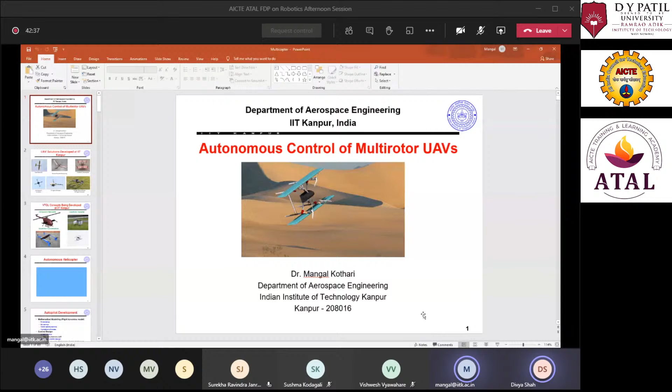Good afternoon to all, and let me apologize that you are not able to see my face through the camera, but in the next one and a half hours we'll enjoy learning about multi-rotor UAVs.

So the session is on robotics. I will be giving a talk on multi-rotors, but it will touch on various aspects of robotics. One of my research interests is aerial robotics, so I'll talk about autonomous control, but it will also resemble ground vehicles that I work on, such as legged robots, and we'll look into different aspects as we move along.

Thanks, Prasid, for inviting me and giving this opportunity. I'm happy to share that two of your alumni are working with me and doing really well. I think Ajit conducted a session a couple of days back, he's also working with me, and there's another student, Vinit Menon, working with me too. So I think you are getting very good training, and I am really happy with your alumni.

Okay, with this I will start my talk, just to give an idea of what we are working on. So we are working on a number of aerial vehicles.

We start with the fixed wing UAV. You've seen fixed wing aircraft everywhere, many of you have flown them. The whole idea is to make it autonomous. It has a 2 meter wing span with conventional control surfaces - elevator, rudder, aileron, and throttle. We control it autonomously so it can loiter, do path following, and other maneuvers. Although we designed this at 2 meters, we can scale it up for much longer wingspans.

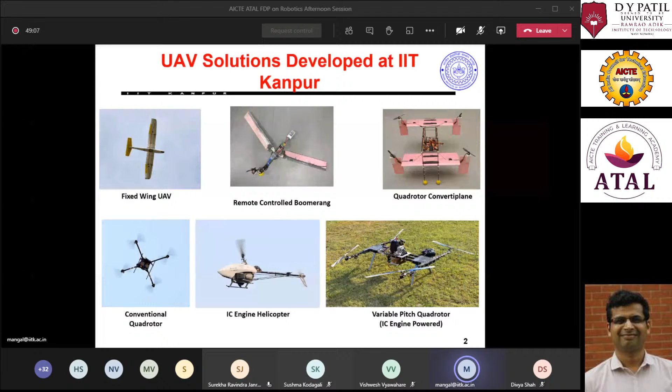As I mentioned in the previous slide, there is a limitation on the quadrotor - an endurance limitation. The reason is that the weight is supported by thrust, and thrust is expensive to produce because it requires power, and you can only carry limited power through your battery. So if one has to increase the endurance, they can put a couple of wings as shown in the figure here.

This makes the vehicle a fixed wing type. When it's a fixed wing type, the weight is supported by lift, and lift is generated by air passing through the two wings. So the thrust requirement now is only to propel it in the forward direction, creating relative motion of air with respect to the wing. This reduces the thrust requirement, so your power requirement reduces and you can fly for longer.

Such VTOL vehicles have an advantage compared to traditional rotary wing and fixed wing vehicles. Fixed wing vehicles require a runway for takeoff and landing - you can do hand launch or catapult launch for takeoff, but for landing you require some infrastructure. This type of vehicle does not require any runway, so you don't need that infrastructure. This is the advantage of VTOL type vehicles.

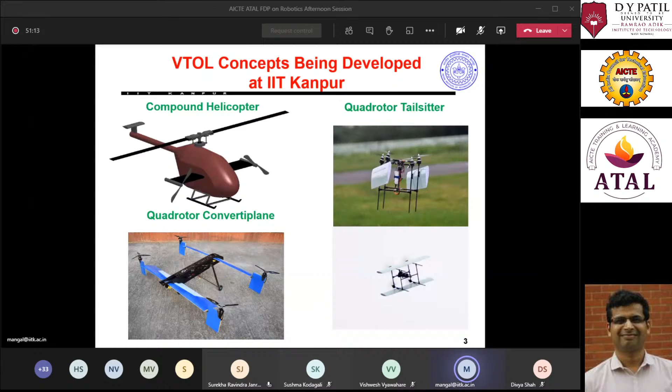Once it's in the air, it can transition from the typical multi-copter type to the fixed wing type, gaining the advantages of the fixed wing configuration. There are many such concepts being researched and employed in the market.

I'll start with a short video of what we have done with the helicopter, and then come back to the technical details. This is our autonomous helicopter we have developed at IIT Kanpur. It's a single rotor, and you can see there is one autopilot board.

So the autopilot board is known as PixHawk. It is made on STM32. In STM32, what we do is have an RTOS. There are different RTOS available, so we are using NuttX, but one can use FreeRTOS, Zephyr, and ChibiOS.

Then you have a middleware. Middleware in the programming has a publish-subscribe thing, so I think you have been introduced with ROS. One node talks to another node, so inter-process communication happens through publishing and subscribing.

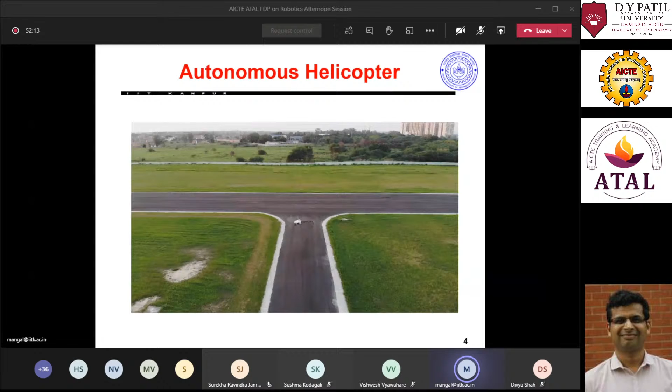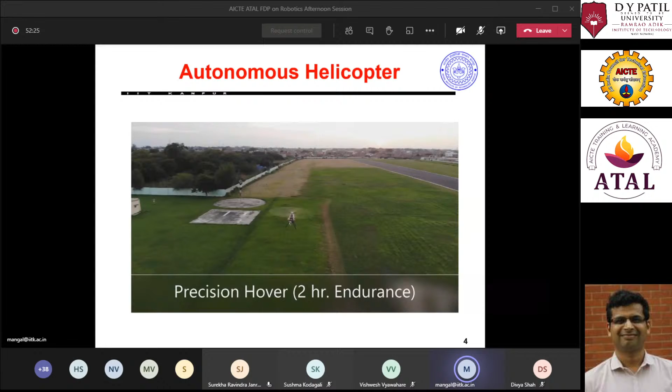So you have an IMU, which has an accelerometer, gyroscope and magnetometer. They will publish their readings, and then you have a sensor driver that will take this reading and create an attitude. That attitude will again be subscribed by your attitude controller.

It will use control like PID, or sliding mode, what is being taught or the expertise of Dr. Prasiddh Trivedi, or any non-linear control like backstepping, and it computes the control command. That control command, through your PWM or servos, is given to your vehicle, and you fly that.

You may have a GPS also, so you read the GPS data. So you have an applications layer, you have a middleware, and the RTOS. That is all done for the PixHawk board.

And the good thing is that it's open source available, so you can tweak the controller if they have given the PID. But if you want to employ non-linear control or advanced control, you can do that and fly. Apart from the control scheme, there is a frame design also.

So you have to design the frame which is robust, which has less drag, so it can have good endurance. You can see that this vehicle is performing different types of maneuvers, and this is a really aggressive vehicle. So when it has to go forward, what it does, you can assume there is a thrust vector that supports the weight.

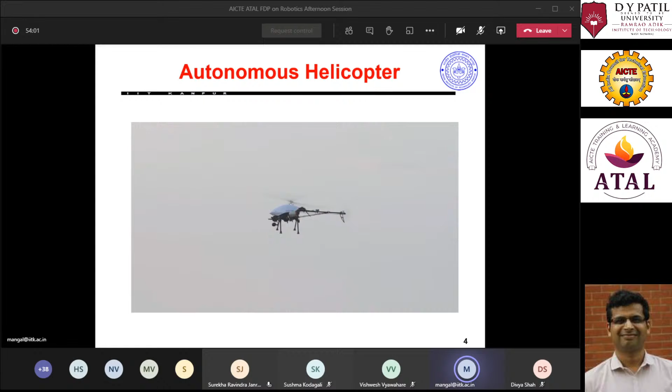When it has to go forward, that thrust vector is tilted forward. When it has to go sideward, the thrust vector is tilted sideward. So accordingly it does that, and for yaw motion it will generate force from the tail rotor, and it has a moment arm with respect to CG. So CG is close to this rotor hub, and then you have a yawing moment.

So now one of the interests is in autopilot development. When we have to develop the autopilot, we require mathematical modeling, because we have to develop the control law based on some models. So we have to develop a flight dynamics model. Why am I telling flight dynamics? Because it's related to flight, and dynamics model means how it evolves with time.

So in order to develop this flight dynamics model, you have kinematics and dynamics. This is already available for all the vehicles, whichever robotics aspect is there. Kinematics relates to position with velocity, or angular displacement with angular rate. Dynamics is a kind of Newton or Euler's laws, F equals ma.

Only thing is, now the vehicle is moving, so it's in a rotating or accelerating frame. It's not an inertial frame, so we have to fix it. Similarly, you have to use the Euler equation for moments. So these are the kinematics and dynamics. Usually it's a bit difficult for electrical people, but once we understand, it's pretty straightforward.

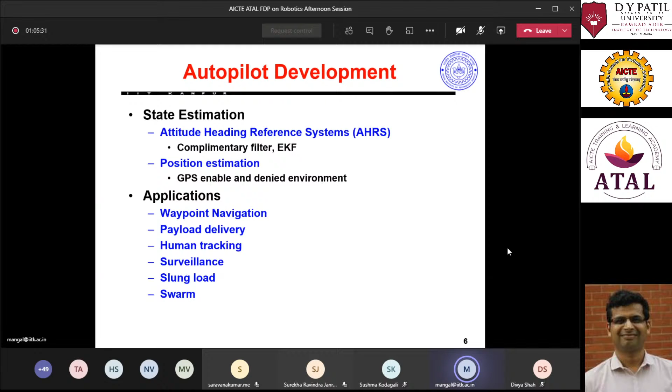Now coming back to a little mathematical detail, after giving this technical background. You might have seen such a quad rotor, an experimental platform. So what is the idea? Each rotor generates one thrust, perpendicular to the plane of the rotor, and there is a torque.

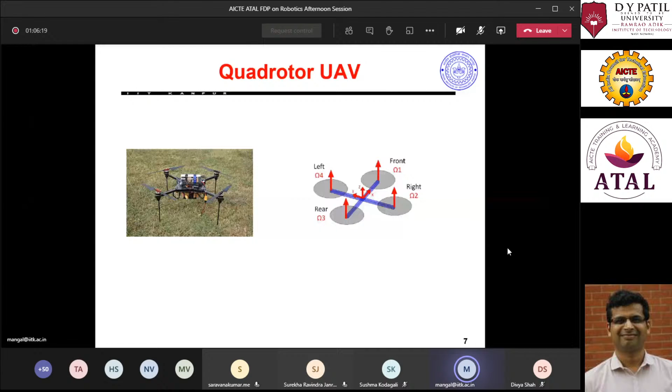The torque is generated because you are dragging the rotor through the air, so some drag force is created. When multiplied by the moment arm, it can generate the torque. So each rotor generates one thrust, which comes from the lift, and another one is torque. Using those combinations, you stabilize the vehicle, or make it move forward or in the sideways direction.

To understand this, when we want to develop the mathematical model, we require coordinate frames. The reason we want coordinate frames is that Newton's law is valid in the inertial, or non-accelerating, frame. The body velocity, or the thrust, works in the body frame. As I told, it is perpendicular to your rotor frame. So they are in different frames.

And if you are using a camera for estimation, it will have a different frame. If you are using lidar, your point cloud will be in a different frame. For example, lidar will give the point cloud in the lidar frame, and the camera is looking into a different frame.

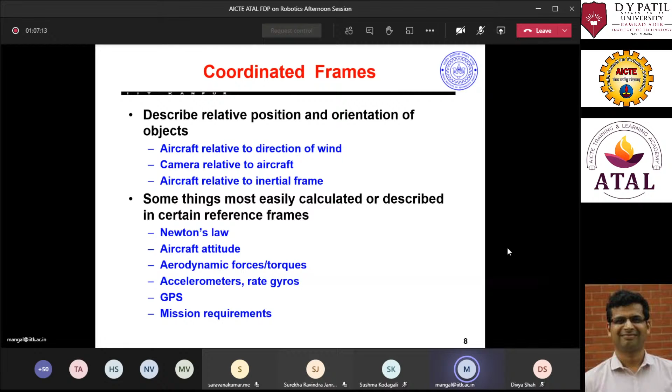So you have to project this different quantity into the same frame for decision making. So apart from the dynamics, from a sensor perspective, we also require different frames. So what are the basic things?

If this angle is known to you, you can play with this, or you may know the relative rotation of that. But then it's difficult to compute. So there are different ways of representing this.

I'll start with the rotation matrix. That gives rise to your geometric control. That means the rotation matrix evolves on SO3.

What happens when I say that rotation matrix determinant is 1? Whenever you rotate, you have a sort of SO3, special orthogonal group. If 9 elements are there and the transpose is equal to the inverse, it does not have a singularity. It has one-to-one and onto property, so any ambiguity is not there.

But then you have to play with the matrix, which requires differential geometry. We are not very happy with the matrix differential equation. If someone gives us ordinary differential equations, we are happy. If we have to solve the matrix differential equation, it's not convenient for us. So now people are doing this.

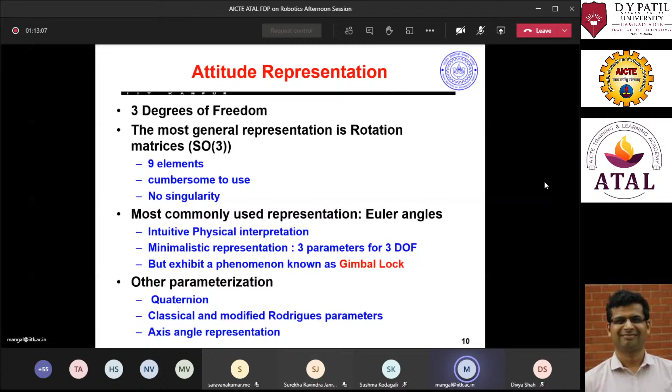In these lectures, I am not deriving these equations. So when you do all the things I talked about in the last 15-20 minutes, what will happen? You will get such kinematics. This is like position kinematics, this is like rotational kinematics, and this is kinetics. Kinetics is nothing but dynamics. You get how UVW evolves, that's dynamics, and this is rotational dynamics.

If you are from electrical engineering and have read the state space method, you should be very happy. Someone has already provided a mathematical model where my control input is T L M N, and states are X Y Z, that is position, phi theta psi, that is attitude - roll, pitch, yaw - UVW is translational velocity, and PQR is rotational velocity.

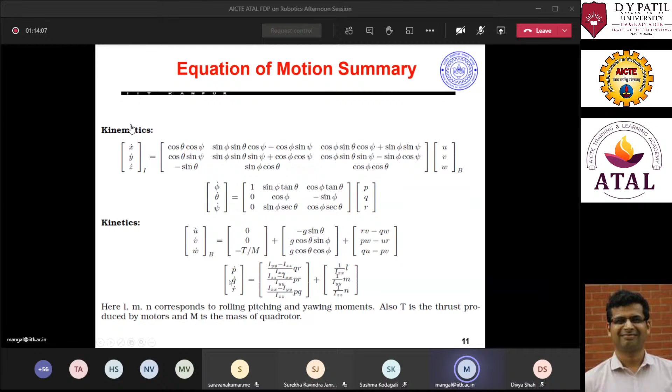Now look into this: CT is some coefficient. If you are not changing the blade pitch angle, this is constant. Rho is air density, A is area, R square is radius square, and omega square is like your RPM. So thrust is proportional to RPM square. Although there is non-linearity, this is constant if you are not changing the blade pitch angle, so you do not have to worry. Similarly, Q is proportional to omega square.

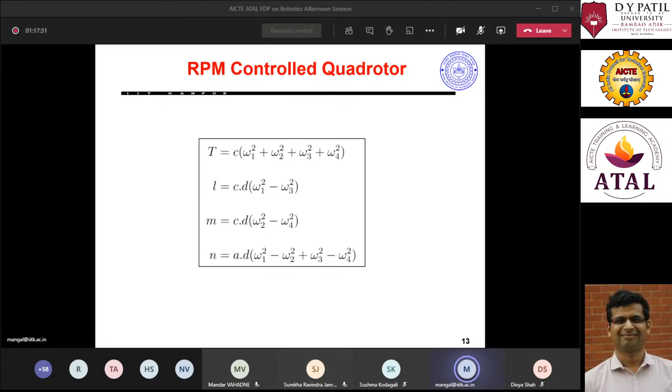Okay, now coming back to that, this is one of the control laws. So what is there? We'll say, okay, I have to control the position, I have to control the attitude. But how many inputs are available? I have 4 inputs and 6 outputs, so it's difficult to solve the problem.

Then what I see, okay, people are doing that. I look into the literature and I say that people solve this using the time scale separation principle. So it is like in a similar autopilot, right? You are serving the different tasks.

So in the mechanical or aerospace design, what they say is that your translational and rotational dynamics evolve on different time scales. So when you are doing anything on the translation, you can assume that the rotational loop has done its job, so whatever demand you give to rotational, it will feed you. But whenever you are doing anything on the rotational, you assume that translation is really constant, nothing is changing.

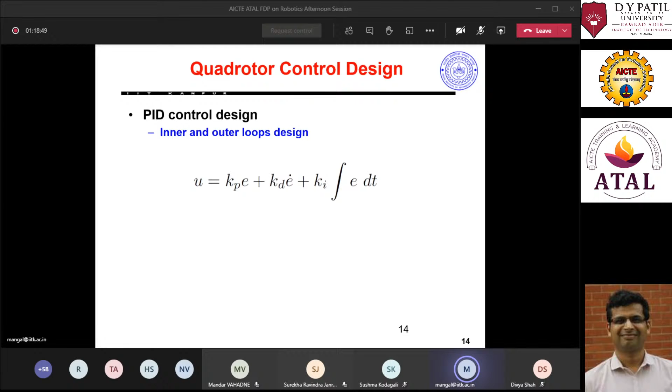So if you assume that you have two fully actuated systems, that is known as the inner and outer loop design. In the inner loop, you play with the attitude, and in the outer loop, that is also your guidance design, you will play with the position or guidance, how to change the waypoints and other things.

So for stabilization, that means you want to do the hover only. So what is there? Phi, theta, psi is your current attitude. Phi desired, theta desired and psi desired is 0, but I am putting here the phi desired, theta desired and psi desired generally. So if we have to do attitude tracking, we can directly use this control law, we don't have to do anything.

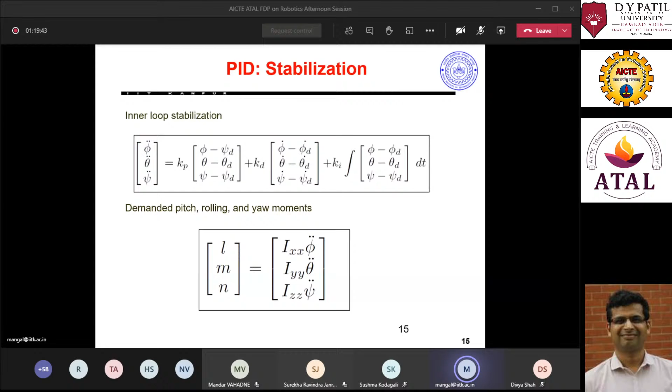Then you have derivative terms and integral terms. So with our PID law, you know what angular acceleration, rotational angular accelerations, is required, and if you multiply with the inertia, you will get what rolling, pitching and yawing moment is required. Now L, M, N is there. Now this L, M, N you use with your control allocation, and you will change your PWM, that is duty cycle.

And similarly, what we can do, now I see what is the error in my position. I use the D terms, I use the I terms, and I find the inertial acceleration. Now what happens in a quadrotor? Say Z you can change using your thrust, but the X and Y position you change using the pitch angle and the roll angle. So this is some approximation.

Now, like Pixhawk type autopilots are available, we will look into that autopilot architecture, and all these control designs are already designed. You have to only adjust the gain.

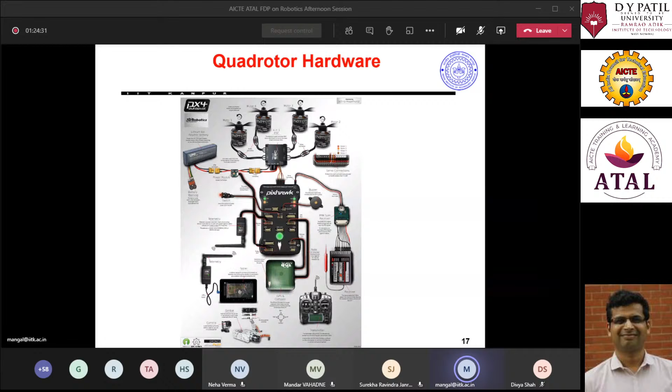So you want some RTOS. What is RTOS? It's a real-time operating system that will help you do anything. The reason you require RTOS is so you can directly call a function saying 'I want IMU, GPS' without doing bare metal programming. So what happens now: you have hardware, and this peripheral driver will be taken care of by the RTOS. Your sensor driver will say, okay, I need I2C, I need SPI, give me the data, so it will configure that pin and enable it.

Then it will read that data from the register, and it will be published on the sensor driver. This sensor driver will take the data, and whatever attitude or position estimation is required through the kernel, there will be an application layer where different applications can subscribe to the sensor driver and get the data of the GPS or the IMU. Similarly, when you want to run your timer, you can ask the kernel, and it will interface with the timer to drive particular pins or a particular motor.

I am not going into a lot of detail on the programming. I believe it would be discussed by someone else. If it's not discussed, lots of open source resources are available. You can look at Pixhawk, you can look at ArduPilot.

At IIT Kanpur we have also developed Navic, and recently the Indian government has launched this microcontroller challenge program, where they have come up with an FPGA-based board. One is Vega and another is Shakti, and they have provided I think two types of RTOS: one is Zephyr and another is FreeRTOS. And then you can have your middleware.

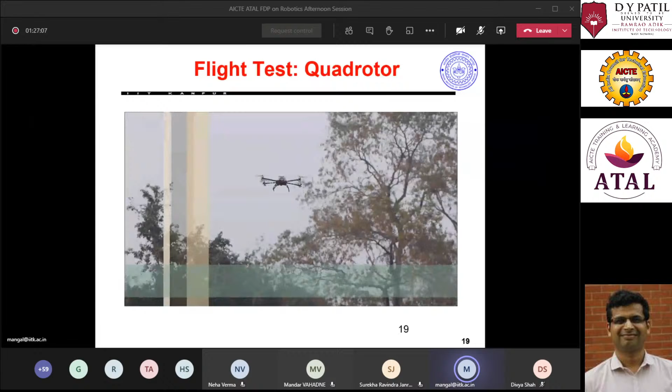Right now what I am going to show is a video from 6 or 7 years back, about what I was just talking about. That work started 6 or 7 years back, and I can talk about it because of the experience we gained doing all these things. This is the reason I am showing that we started from the very basic things.

If you can see, the autopilot was put in one box. If you look at DJI and Skydio now, you may not like it, but you do not reach that level unless you start making your hands dirty with the hardware and learn the basic things. So we designed an autopilot, going through each nitty-gritty detail as I discussed. We understood what RTOS they were using, Nuttx, which is one of the very good RTOS. We also explored ChibiOS, another one used in autopilot, and then we did all the basic things.

So this was our work, and I have given the idea about all these things. So what is the limitation of conventional quadrotor?

Apart from the autopilot things, we are also involved in designing the quadcopter. As I told, everyone uses the same 4 motors, because they buy either from T motor, like Tiger motors, or maybe KDE or local motors. Everyone uses the same battery, lithium polymer or lithium sulfur - I don't think people use lithium sulfur now, but lithium ion. But some people get 10 minutes of flight time, another gets 30 minutes, or maybe maximum 60 minutes. What is the difference? The difference is in the optimization.

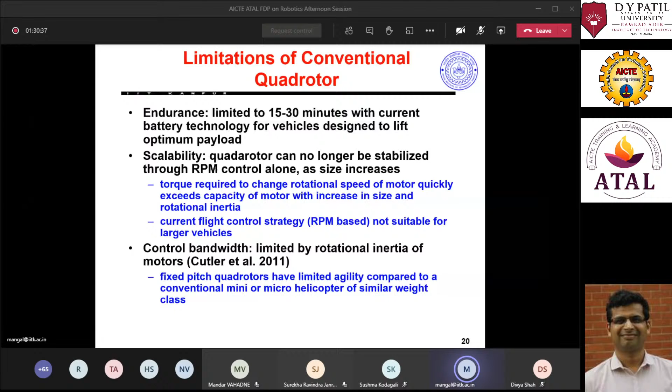We are not the ones who started working on this - there are people, even during the invention of the helicopter, who explored this idea, but it was given up. The reason is that the alternate design, at that time, got a lot of funding. Maybe I have a video I can share. But we are the ones who proposed for the first time a systematic flight dynamics model, and based on that a lot of work was developed.

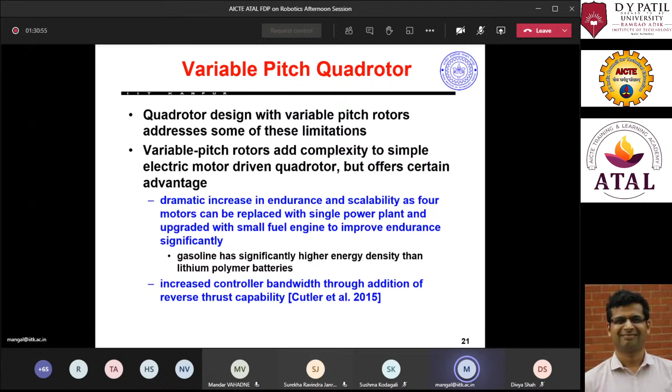So let me explain what is a variable pitch quadrotor. In a conventional quadrotor you have a motor and a propeller which are fixed - nothing, you just change the thrust by changing the RPM.

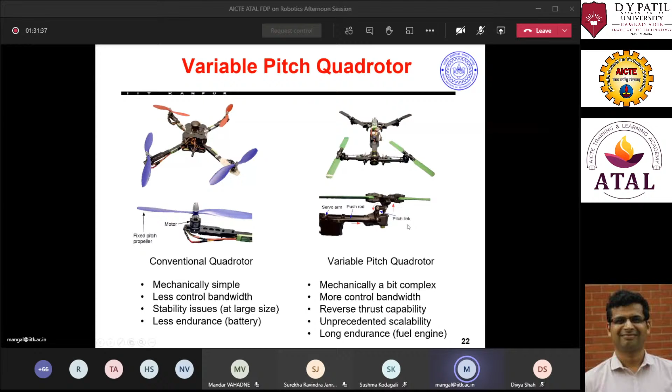In the variable pitch quadrotor, the rotors are placed with the help of this assembly, and there is some rod which changes the blade pitch angle, so you can move it up and down through the servo. You can change the orientation, so that will change the blade pitch angle. It's a bit mechanically complex, but we don't have to worry - there are precise manufacturing methods and servos available, so we can achieve that.

Now we can look into other control designs also - that could be back stepping or dynamic inversion. Dynamic inversion is straightforward to do, but it cannot handle modeling uncertainty, because you are cancelling out everything. So even if a slight inaccuracy is there in the cancelling, it may degrade the performance of your control scheme.

So one of the approaches is to use back stepping. Quickly I'll show you that - don't worry about it, don't get into the mathematical detail. Nowadays all video lectures are available. Whatever I am talking here, if you do not understand anything, if you Google it or search on YouTube, you will get all the lectures available. You just have to go through this and try to implement it.

What this backstepping requires is that the system should be in a strict feedback form - like x dot equal to fx, or x1 dot equal to x2, x2 dot equal to fx plus gx u, and then you design the u. I'm sorry, I am not using the board - I should have, but it didn't occur to my mind, otherwise I would have written it here.

So we choose one system phi, theta, psi, and the other one PQR, and two subsystems in the position. One is altitude Z and Z dot, because we can change the throttle to adjust the speed, and another is X and Y, using phi and theta to change it. So we can write it in this strict feedback form - this is like rotation, this is horizontal, and this is altitude.

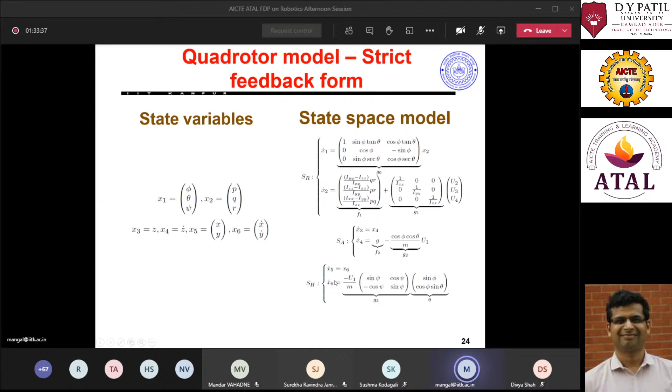Okay, this is a subsystem, and now we can design a different control law for this. Unlike a fixed pitch control law, now this control allocation becomes difficult.

Why does it become difficult? When we design the mixer or control allocation, you have some value of T, L, M, N, and you have to give the PWM. With T minimum, what will be the pulse width, and with T max, what will be the pulse width? Now we have CT, and the relation between T,L,M,N and CT is non-linear. So whether we do curve fitting or generate lots of data to fix it, that is difficult.

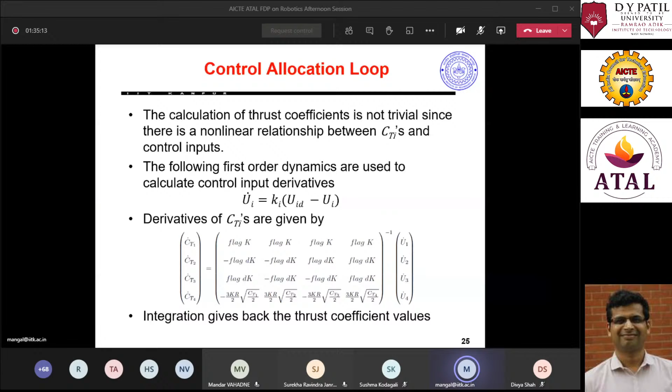There are different ways, and we have explored many things. Here in this talk, to make life easy, I am doing dynamic control allocation. I introduced one loop, telling that there is actuator dynamics, and actuator dynamics evolves like a first order differential equation or a delay function, depending on your background. It takes some time to track it. Using that dynamics, you get this equation for CT, and now you can invert it to get CT dot, integrate it to get the current value of CT, and then give it to the mixer as before.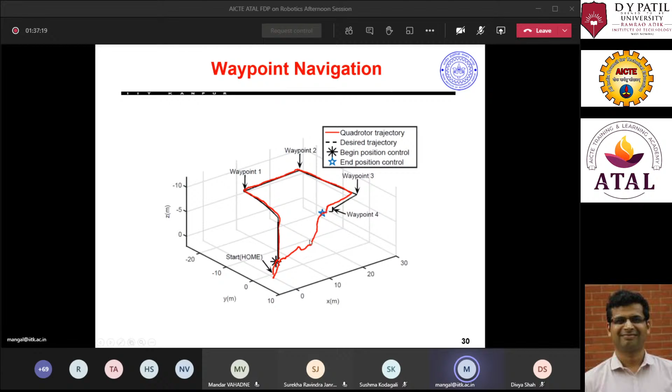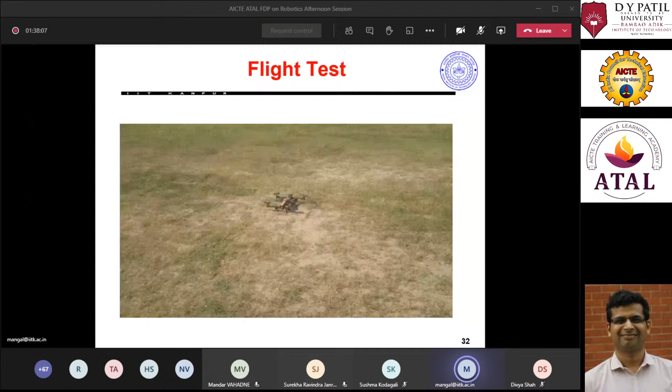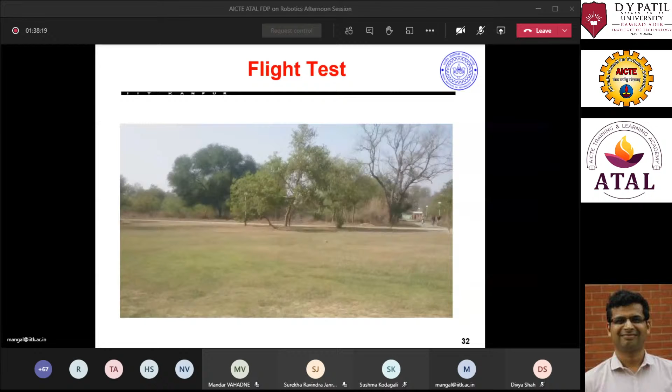Now look into this - like a simple rotor, we have a variable pitch version, and it can do whatever the conventional quadrotor was able to do.

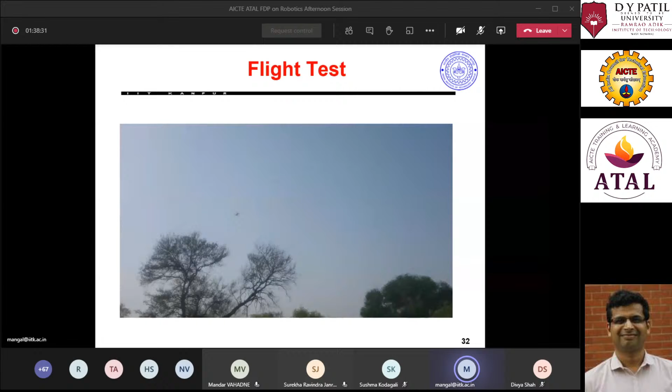With that done, now we have come to the engine-based quadrotor. For the engine based quadrotor, we had to change everything - it was hard because we put the engine here, so the whole transmission system was designed and optimized. Now you see the blade does not have fixed pitch because we are changing the variable pitch. We also put the tank here, and this is the Pixhawk. You can see the battery and the transmission system.

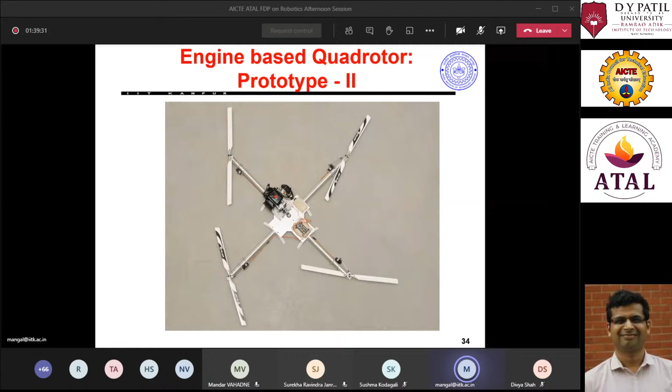Okay, and there was another prototype. So we have used two types of the quadrotor. One is based on the torque tube, that is more accurate, and the alternate or the other one is based on this pulley driven design. So even some manufacturing defect or manufacturing alignment is not proper, you can still survive. Otherwise, torque tube requires precise manufacturing. Okay, so these are the transmissions.

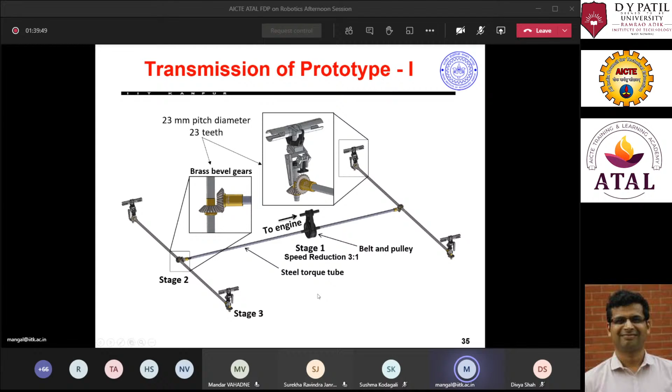And you can see the bevel gears. So all the optimization is done here. How to choose the gear, what the gear ratio should be, how many teeth are there. So this is the torque tube based design, and this is the pulley system I have done, belt driven.

You can see that one is a center engine, it is driving the main, and then you have the 4 subsystems, this is for one motor, another motor, other motor, and the other motors. So in this way, if you control the speed, you control here. Some variation due to the belt is there in the speed, and if it results in thrust, we are expecting to handle that through our control design. So RPM has been also mentioned.

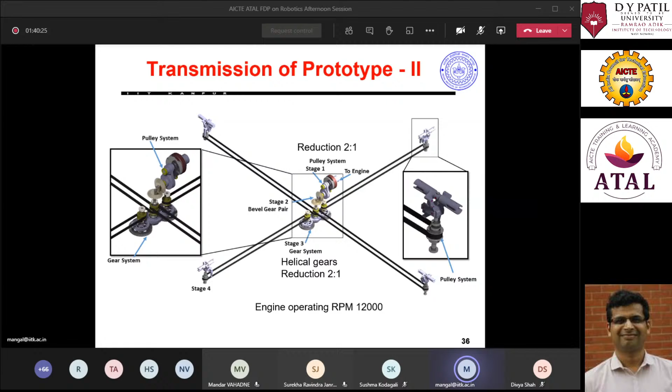And if you have to win the game of the quadrotor design, when I say win the game, if you want to be the best, for each part you have to reduce the weight, and you have to get the optimal weight. Each gram of weight reduction will give you some advantage in endurance, maybe a few minutes. So the whole flight is designed this approach, or whatever I have told about the conventional quadrotor.

See, quadrotor is now become state of the art. Anyone can do it, you can do it, it's not a big deal. If you Google it, or look into open source, it's easy to design. There are autopilot codes easily available, designs are available, BLDC. See, motors we are not manufacturing, we are not manufacturing the servo.

Only thing you have to do is bring some tubes and connect it. And the autopilot board, we are also not designing. We are not designing any autopilot board from scratch, the STM32 microcontroller, we are not designing that anywhere. So most things you bring out from the market, and you assemble it and start doing.

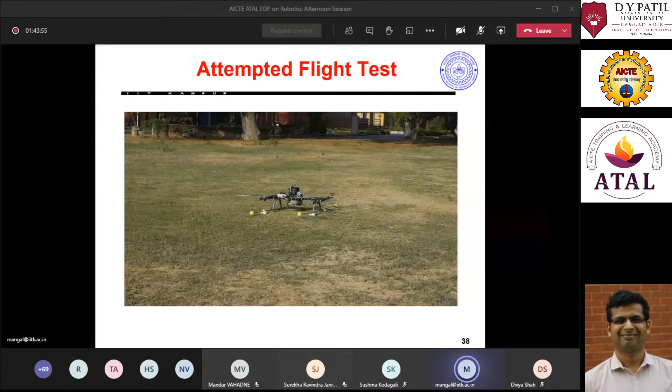IMU readings go bad. And if you are not filtering it out, mechanically or from the signal processing point of view, it will get into your autopilot, and everything will be gone. So from the mechanical perspective, as well as the autopilot perspective, you have to be careful about that, and you will not learn until you do it.

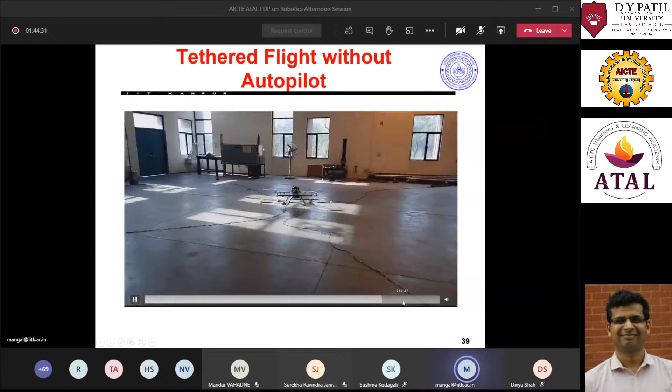So we also started from the gate. We again came to our workshop, our lab. Now we have tied it and changed something, point by point. We started looking into the autopilot, looking into the control, and you can see that's how development happens over that time, then you can see that.

So now I want to show the helicopter, not just the quadrotor. I don't want to discuss all the mathematical model and control here, because it is very involved and we have limited time, so I'll quickly talk about the application.

Prasid, how much time do I have if you are available? Maybe another 10-15 minutes? Yes sir, yes sir, you have.

Okay, so what we have done now, you can see it's a kind of magic. You are flying upside down.

So in the beginning I showed some video where we use this geometric control. Now the attitude is all defined, and we flip the switch so we can change the blade pitch angle, not only on the roll axis but on the pitch axis also. See, flip the switch, it will start flying.

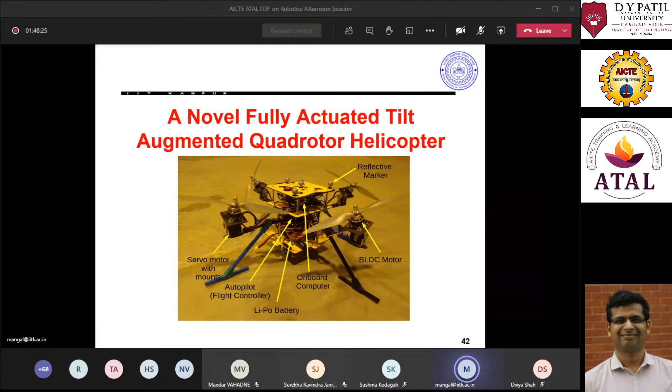In these vehicles, you want to save weight, so you don't design a separate gimbal. The quadrotor frame can stay as it is - the vehicle does not have to turn to travel forward and backward. These rotors can tilt in the front direction or side direction for moving forward and sideward. Every rotor generates thrust, and now the thrust can be tilted.

So by tilting, we add servos, and obviously this comes with some added cost. The added cost is that we are not using a gimbal, but now we are using additional actuators - servos. So these are 4 servos, and these 4 servos control the direction of the thrust vector.

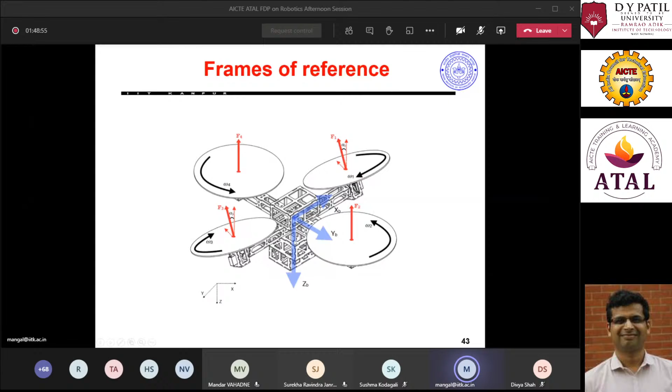So we have used the quaternion. The reason for using quaternion is that we wanted to be more mathematically accurate and leave less error in the autopilot. So this is quaternion basics.

You can see it's a higher order of complex numbers. You might have seen I or J earlier, only a single axis like complex number. Now you have a complex number with I, J, K. It's like a kind of vector algebra, but it's not vector algebra because I square, J square, K square is -1, and you have a cross product here - I times J equals K - but it's very similar to that. It has 1 scalar part and 3 vector parts.

Using that, we represent the attitude and use it in attitude control. The good part is that estimation is also done in the quaternion, so you are not converting anything - the system does not gather error, or the error does not seep into the system while converting.

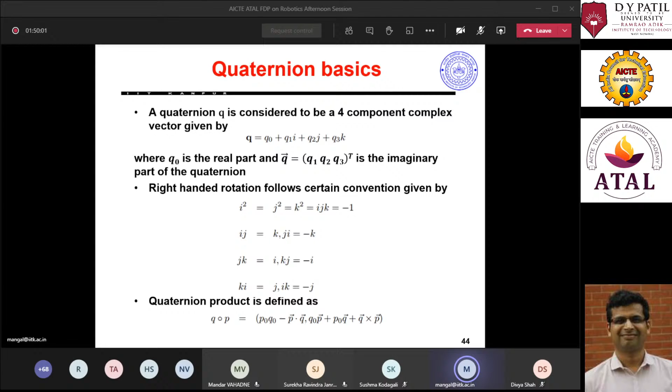Okay, straightforward. So this shows some relationships of how the quaternion works. We have seen the 3-2-1 rotation earlier, so here's how it comes about and how the rotation matrix comes.

This is quaternion attitude dynamics, and these are the Euler equations.

Now we have introduced two additional degrees of freedom: thrust vectoring. Is it possible to rotate all the thrust vectors of all four rotors? For simplicity, we have constrained that the opposite pair will move by the same amount, so the two degrees of freedom increase, giving a total of six degrees of freedom.

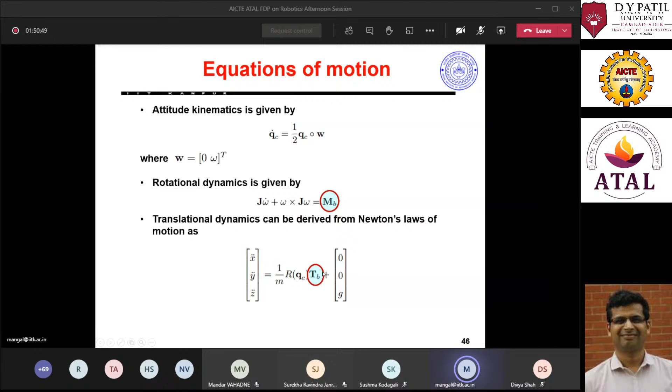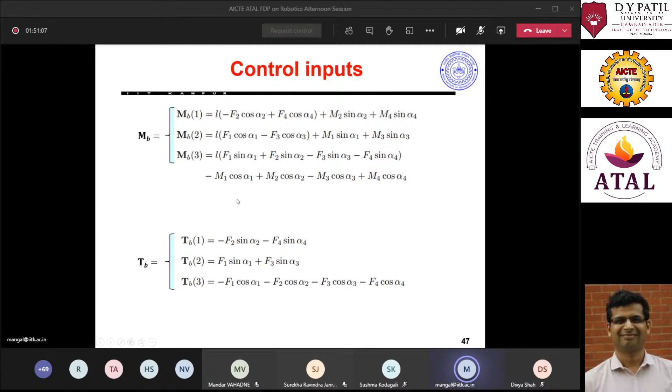Now we can control translation and rotation separately, so the time scale separation principle we assumed earlier is not required. These are the control inputs. The mixing is a bit tricky because angles are involved, but it can be represented like this, with cos alpha involved, but we have to live with that.

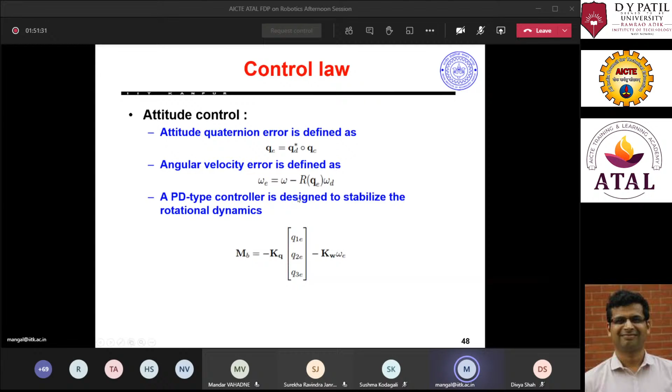Attitude control is like a simple PD control. You compute the error in your quaternion, but it follows different algebra, not the simple vector algebra - it's like complex numbers. So you calculate the error like that, and then compute the angular velocity. They are defined in different frames, so you have to use the rotation matrix, and then you can use a simple PD type controller.

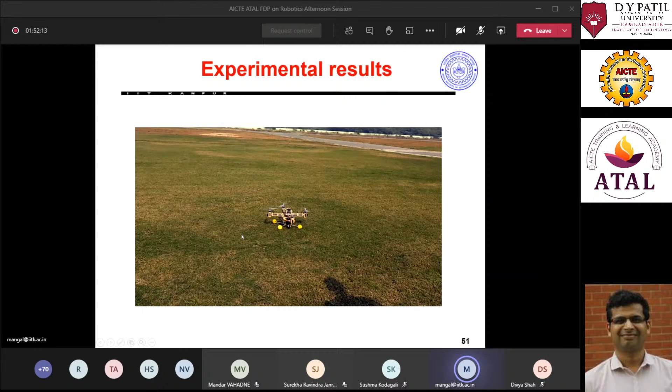So that will generate - you have given the body force here, you do the allocation, and you get this. This is like the first flight; this would have been done three years back. For the first frame, we used balsa wood, which is very lightweight, so we wanted to reduce the weight, and designed the frame to do the basic function.

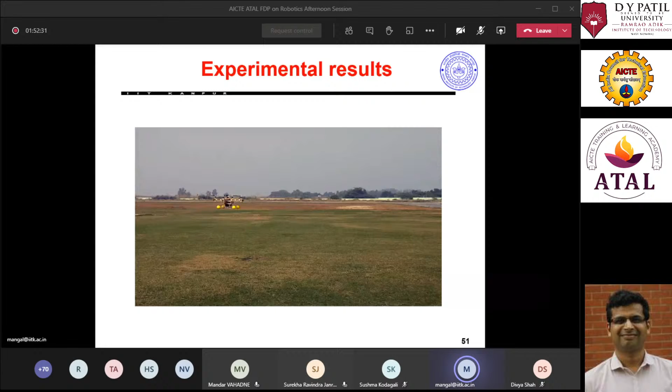So this is another work using this quad rotor. We have done tracking. Usually for tracking you need a deep learning algorithm, and in a deep learning algorithm you need a GPU.

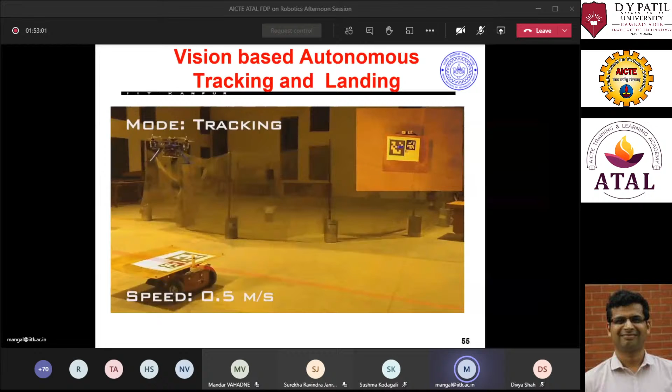I'll come back to that part - let it get over, explain.

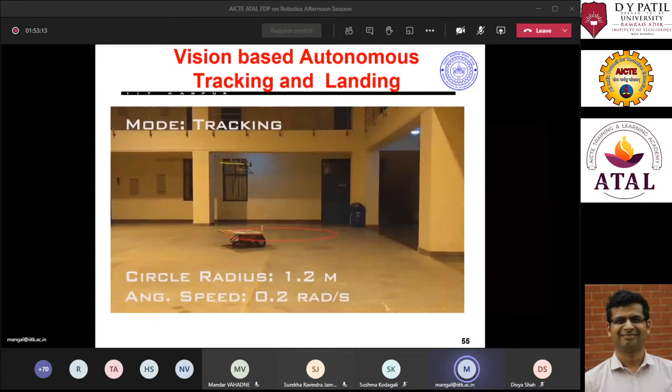So we have used an ArUco marker. This is like a binary image, 0 and 1, grayscale, so they are easy with the autopilot. You can process it, or like we have used MCU code, which can easily do it. Otherwise, if you are doing conventional image processing, you need a CNN type of thing. So this ArUco marker is easy, and we have used three ArUco markers.

The reason we have used this combination is that if you are at a different altitude, you are at least locked onto one of the ArUco markers, and the quad rotor.

My student is saying that he is not controlling the quad rotor - we have put this board onto the jeep, and the quad rotor is tracking. It's generating speed by tracking this ArUco marker, generating the forward speed. The vehicle is moving at 15 kilometers per hour, and it goes and lands on the jeep.

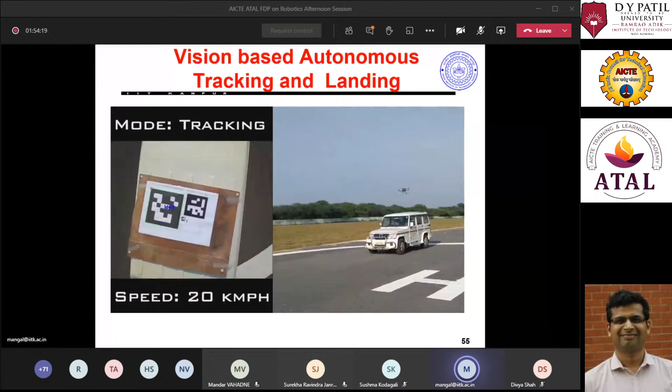I was behind, so if something went wrong, we could confirm. The student was now sitting in the car, and we moved at 20 kilometers per hour. You can see the frame is stationary.

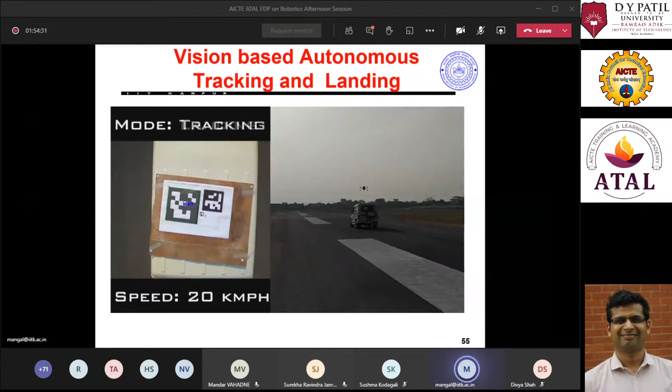We have done more speed also, but I'm sorry, I don't have that here.

What I want to show - if you want to do human tracking, what do you have to do? You need some kind of camera. Although the camera is lightweight, it comes with added complication: now from the given frame you have to identify the human.

Maybe multi-object target or single object target tracking. So if you are doing the tracking, there are two parts: one is detection and another one is tracking.

For detection, you can use conventional computer vision, like finding features based on key points, features like SIFT. SIFT is popular because it's invariant from direction and other things, but you can also have a HOG, or a Harris detector, or something where you detect lines and edges, and then try to make it out, and it's usually difficult.

So what is the advanced way? You use convolution neural networks, so that you learn end to end. Even your filter, you learn it, like these edges and other things.

A lot of weights are available. When I say that, you have a convolutional neural network, these are deep layer neural networks, and to run on a simple board like RPi or NUC, these algorithms cannot run, and you need a GPU. There are GPU boards available which you can run, but then they are power hungry.

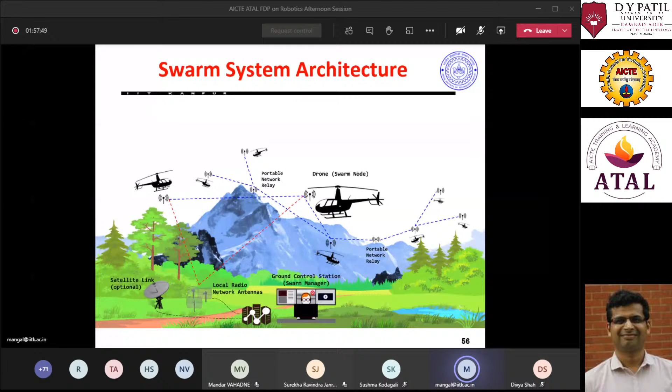So anytime you talk about SWARM, one is the platform/vehicles, another is autopilot, the third is communication, ground station and vision. These are the basic components you require.

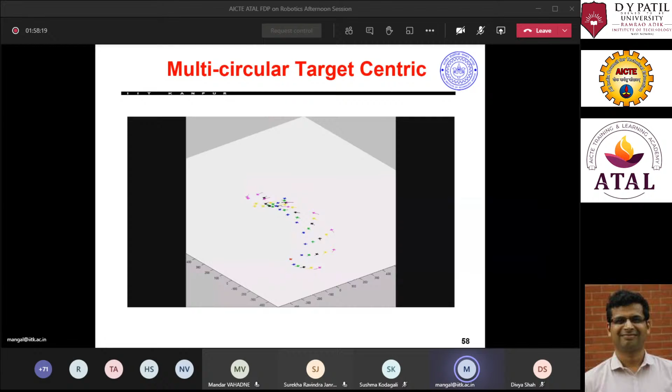Now coming back to the software. Your vehicle is there, and you can see it running on your ground system. What happens is we have one-to-many running on ROS.

Once you're introduced on ROS, you have mission and path planning, whatever is given, you plan the path. Then you see the SWARM health monitor, and you have a communications module, that could be star topology or mesh topology.

So you have some communication module available, like a telemetry unit or Microhard unit, that talks with the ground station. It says, okay, I am afloat or I am alive in the sky.

Then you can have object detection and classification. Anything sent by the vehicle, you run on the ground station where you can have a powerful GPU, and you can quickly run these algorithms and make a decision.

You can do video processing, have real-time mapping systems, and do network optimization - that means for connectivity on the ground, we can track the vehicles and orient the antenna, but we may have to have multiple antennas for that purpose.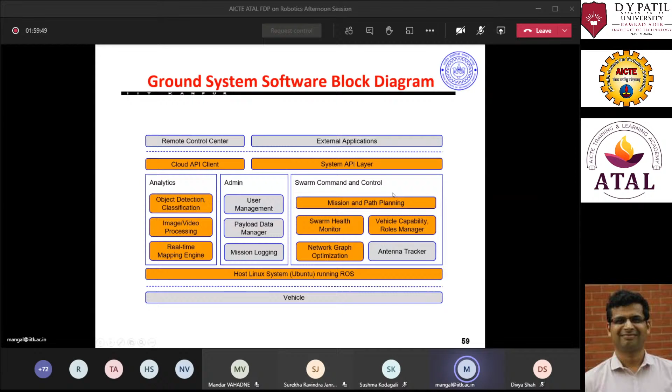Then for swarming, we can have different swarming algorithms, which we'll see in the next slide. So this is the edge system - that would be on the vehicle itself.

So what will it have? It will have a companion computer. You don't want to, you want some fail-safe features, so you will have an Intel Up board or some GPU board, and that will be running your ROS.

It has been connected with the camera, so it may do basic processing and the rest of things, or it will make the decision and inform the autopilot. So the autopilot will be responsible just for waypoint tracking, and it may do basic things.

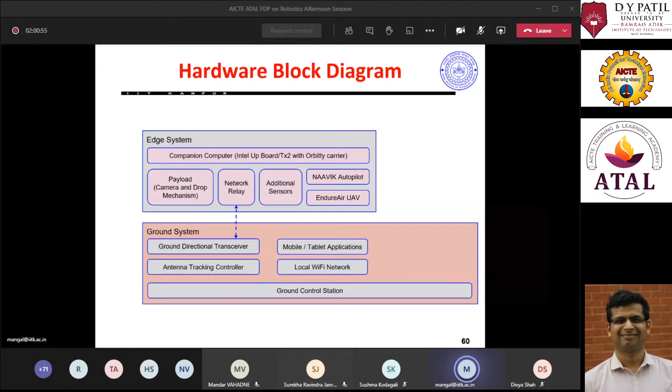So if you are doing the vision processing, it will be done on the companion computer, and they will talk through some network. So it may not be possible that all the vehicles are directly connected with the ground stations. There could be a relay, or they are connected through some other vehicle.

So this networking is involved, and you can see the mesh network come into the picture. So this is a hardware. Now I want to show the video, and you can see we have a 4 node setup, and the basic idea is demonstrated with the vehicles. One is a leader, node 1, controlled manually, and all the other 3 try to follow it. They make a triangular type shape, and the followers maintain the relative distance.

Based on this, the position has been transmitted to all the followers through the mesh network. We have created a mesh network using Wi-Fi, so you can have very quick data transmission. If you do not have Wi-Fi, you have to rely on the onboard telemetry, and only there this networking comes into the picture. Based on the position of the leader, they find their relative position and update it.

And that is sent to the individual autopilot. So I think this is... let me talk about this, what it is - that's the suspended load system, where the cable will suspend the load. This is a basic demonstration.

So what happens to the quad rotor in this stabilization - now it will be disturbed, and you can see that whenever it's disturbed, the quad rotor moves and they try to stabilize themselves.

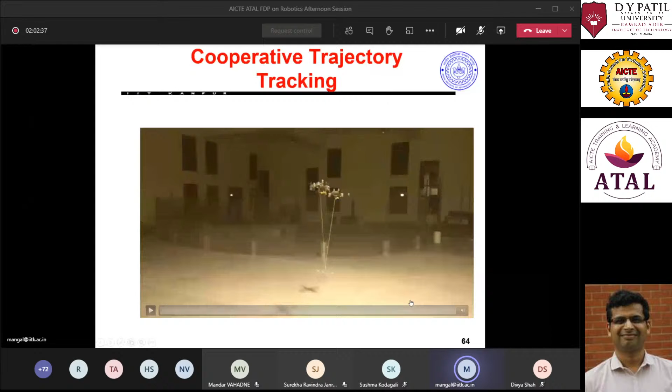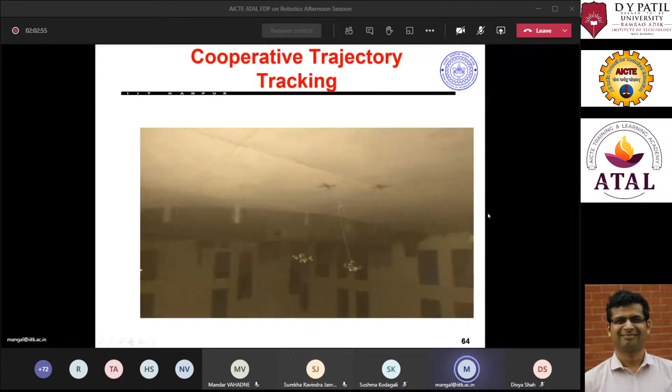Right, so this is like trajectory tracking. For some reason the video has been inverted, and I have never corrected this slide. So you can see that it can be tracked, but if this happens, this is a magic - quad rotor on the ground and the load is in the air. So the reason I am showing this is to get motivated to do all these things.

And then we can do this conventional robotic application, what I was talking about - path planning. So we have an RGB camera, this is like a ZED camera, you have a stereo, and you have color information also. We have created a map of the whole environment.

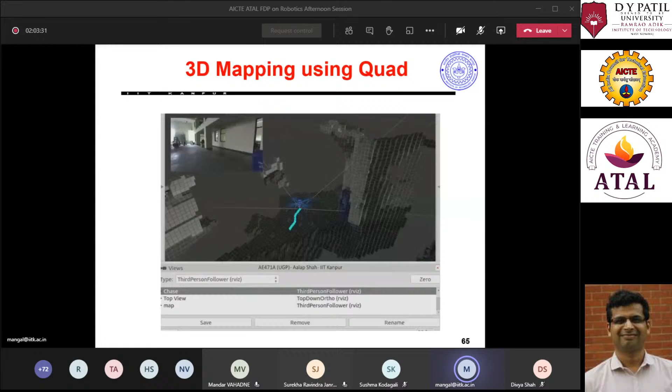So the quad rotor is flying here. You would have seen such videos on YouTube or maybe in some talk, and the whole map is created. So this is the whole idea, and this could be useful. Human tracking is also done. I don't have that video maybe, but this is in ROS - I think ROS and Gazebo might have been introduced, Ajit might have talked about it.

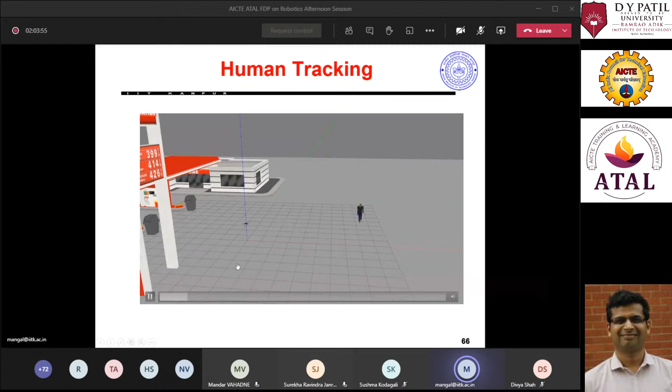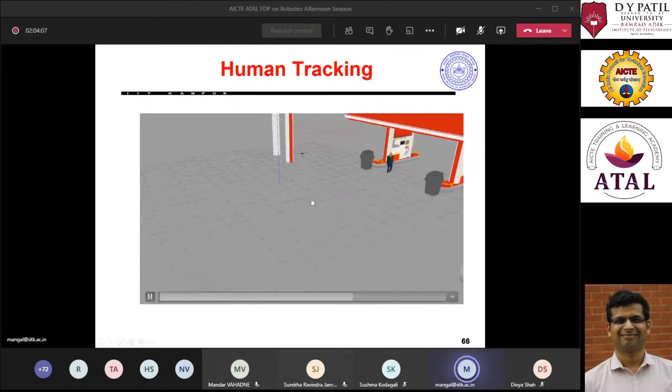See, the quad rotor is following that. So now we are trying to implement this in real hardware. We are using this YOLO deep learning, CNN YOLO 3 and YOLO 5. But see what happens - this camera gives only good information up to 10 and 20 meters. So if you are following something, it will make a sound and it may hide. So we have to come up with maybe a high optical zoom camera and the right set of hardware, so that it serves our purpose.

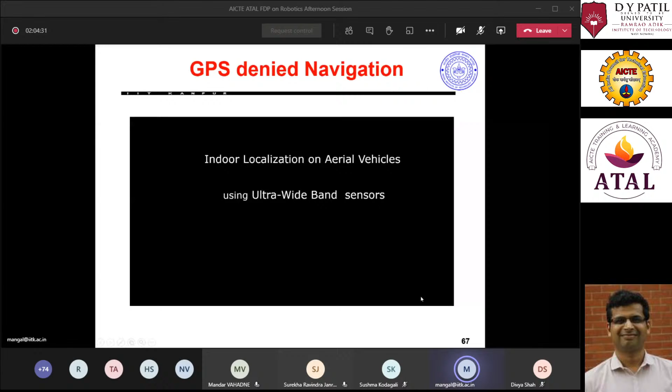So this is like indoor localization without GPS. What we have done is use the ultra wideband sensor. What it does - it is time of flight based, it gives the range, and now you don't need GPS. Without GPS, it gets the ranging information, and if you see this, it is ultra wideband based sensors - it gets accurate range information.

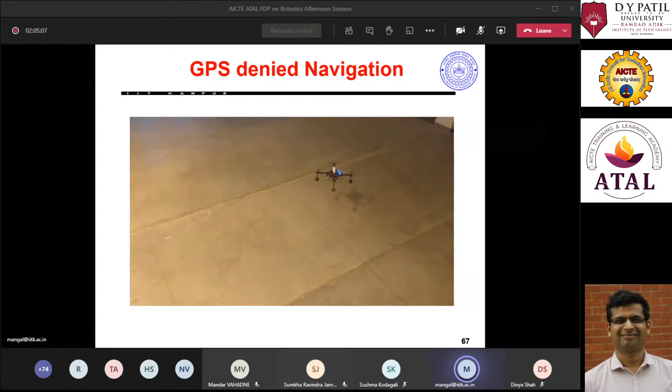Indoor we get the accuracy up to 10 centimeters. So unlike the motion capture systems - one is Vicon and OptiTrack or something - this is pretty cheap, and we have created our own real-time positioning system. We have taken the decawave sensors, and for that sensor we have designed the PCB ourselves. We have developed our own sensors, and that gives real-time position of the vehicles. It can even give the yaw angle, and it is damn cheap. If you want to buy from the motion capture system, it may cost 1 or 2 crore. The whole unit we have developed may cost 5 to 10 lakh rupees, and it gives accuracy of 10 cms.

And unlike the motion capture system, it can work both indoor and outdoor.

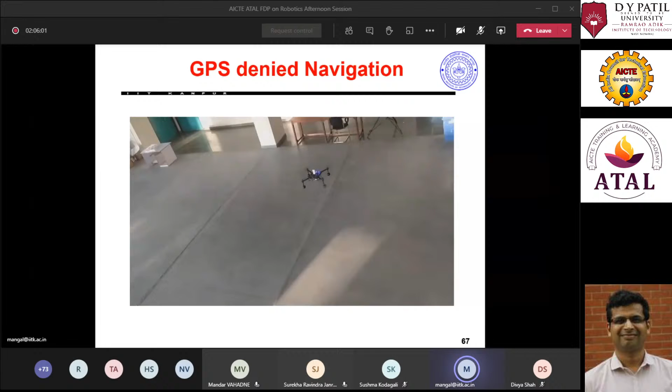So what we have done, if you have 4 or more sensors, it does the triangulation, finds the position, and the position is fed into your EKF, and you will have a trajectory. This project is supported by MHI Japan.

So I have done this for Japan. In summary, I have shown you the basic quadrotor, then the advanced type, or different version of the quadrotor, variable pitch. It's a different variant, engine powered and tilt-rotor. I have discussed a lot of applications. I did not go into a lot of detail, but I have given the basic idea about the autopilot, how the hardware works, how flying things work, and I have talked about various aspects. We do not only believe in indigenous development, we believe in design in India, made in India.

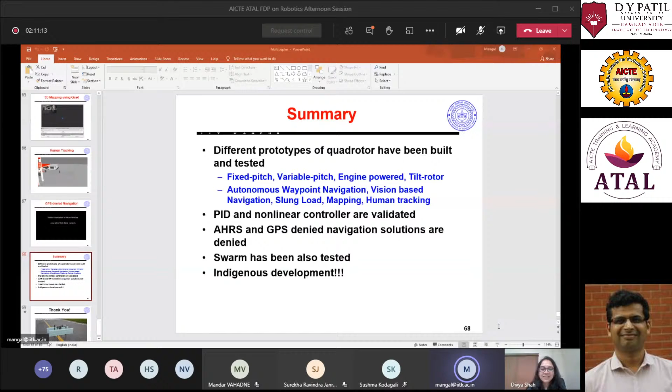Any other questions? Thanks for coming. Okay, you can thank me and then...